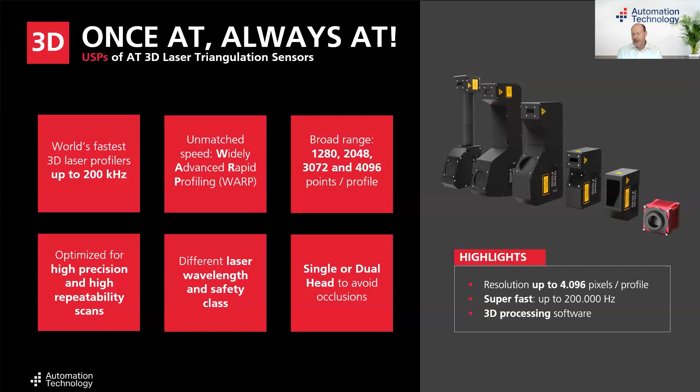Out of these sensors, we launched last week some special series. This is called ECS, standing for Efficient or Economic Compact Sensor. This means this is more or less the entry level, and we use the sensor with 2000 pixels - still not high speed, but fast enough for a lot of applications, and only with a red laser, 660 nanometers and 2M, meaning laser safety is not a big issue.

This is especially for markets like food and beverage, logistics, robot vision, where you need maybe more than one sensor - a multi-sensor application. So the costs are really important. Also, regarding the application, we talk about more or less millimeters, not micrometers. So this is the entry level.

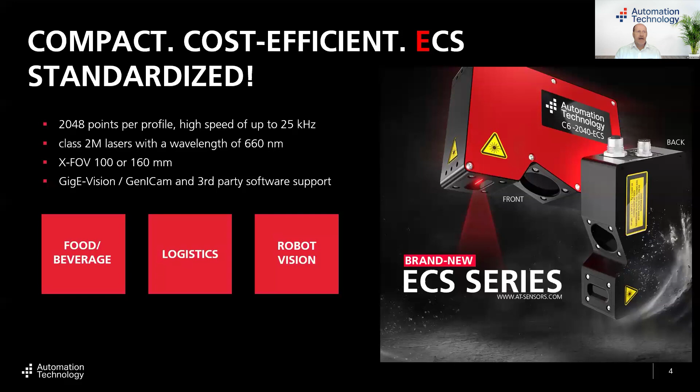And then I go directly to the high-end level. Last year we launched our new imager developed by AT - it's called the C6 3070, meaning 3070 pixels. If you look at the standard, normally a 3D sensor has an imager, and you transfer the complete image, meaning all pixels from the imager to the FPGA.

We go another way, and with our 3070 imager, there is a pre-processing. Means, you see it maybe in this graphic, we just detect the laser line directly on the imager. And then we transfer only a few pixels around this laser line from the imager to the FPGA. This means maybe 10, 20 times less information, and it's also 10, 20 times faster. And with this imager, we achieve up to 44 kilohertz.

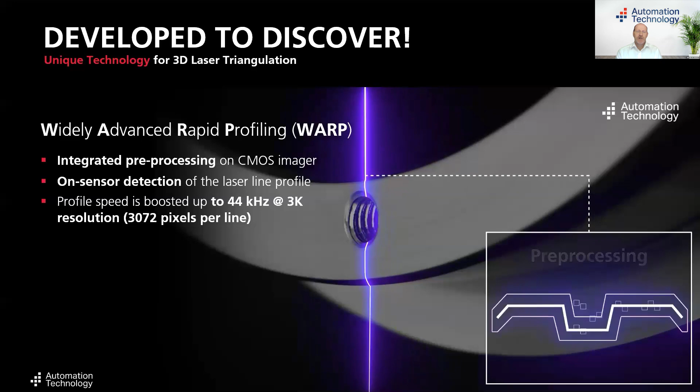And with this imager, in combination with the new 6 FPGA, which have double speed for the high resolution sensors, and in combination with the new I/O board, which has 2.5 and 5 gigabit per second to transfer this much information from the sensor to the PC, that's what we are calling warp speed. As I said, it's standing for widely advanced rapid profiling.

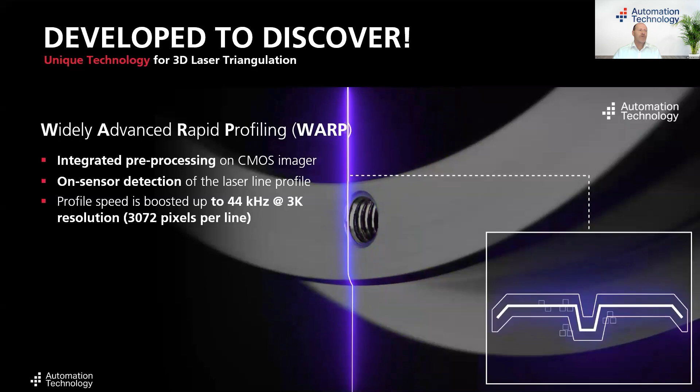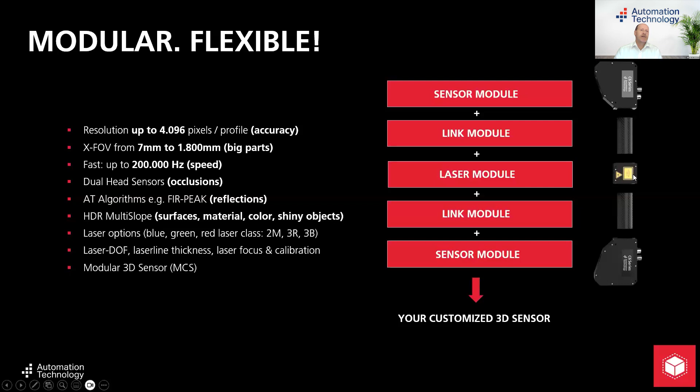But this was from low end to high end. And we also have some special series. We said yes, there are a lot of standard components and standard sensors. If this is not flexible enough, we have our modular 3D sensor, and then all of the imagers and lasers and so on, we can put these components together to have really a customized sensor, like you see on the right side. This is a dual head. There's a sensor module, a second sensor module, and in the middle, in between, there's a laser module.

As I said, this is a customized sensor. This sounds expensive, but it's not. We can have no minimum order quantity or additional engineering costs. And at the end, you have an MCS configurator. Then you insert all the data you need in terms of the laser, the working distance, the field of view you need, the triangulation angle, and then there's a sensor coming out.

It has at least two modules. One is the sensor module with the imager, the optics, Scheimpflug, and mirrors. And the second one is the laser module. And depending on the numbers which you insert, there could be maybe no link module in between, a small one out of metal, or a big one with a laser tube, carbon tube. So at the end, you get really an optimized sensor for your application, meaning the best solution you can get.

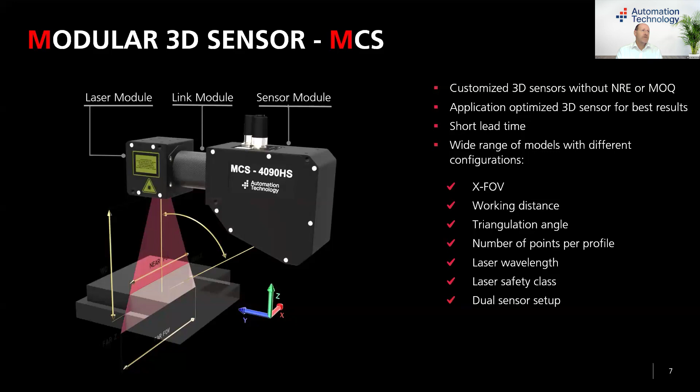And as we see it in a lot of customer applications, they have maybe a sensor where the field of view is not big enough, and they go maybe into the far field. Yes, okay, you can do that, but you can imagine you are out of focus, meaning the results are not really optimal. So this is the MCS, and out of the MCS, we made some special sensors called XCS.

It's really standing for maybe extreme, excellent, and this is really for performance. So we take an MCS with a high resolution, with 3000 or 4000 pixels, and bring that to a really small field of view, from 48 to 53 millimeters. And this is especially done for the electronic markets. For example, on the left side, it's for pin grid arrays or ball grid arrays, the BGA, or for pin inspection, where you need really high resolution and extreme speed.

In the past, maybe triangulation sensors were not fast enough for these applications. Now we can do that. And yes, for high speed you use the 3070 warp speed, and this is the imager. You also need really good laser line projection. Therefore, we need a special blue laser with clean beam technology. And at the end, you get a really thin laser line to get good results and a lot of information, for example, from these pins.

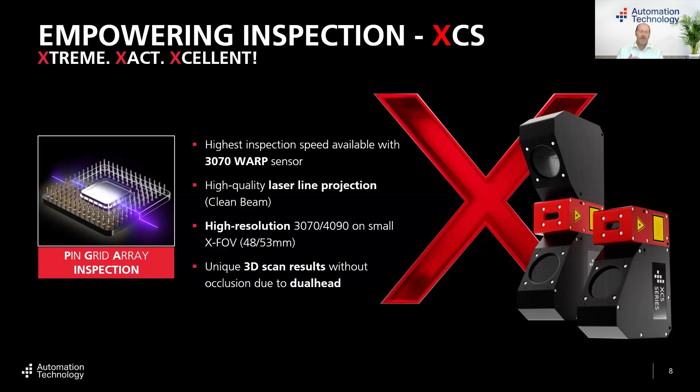So this should be a short impression to see what sensors we have. This is the first part of super fast, to get the images out of the sensors. In the past, yes, we just provided a sensor. And I always see a 3D turnkey solution like a puzzle, a complete puzzle, and we had one puzzle part. This is the image, the 3D image, yes, for sure it is the most important part.

It's because if you cannot see what you want to measure, if you cannot see in the image what you want to inspect, which defects, the best tools will not help. So in the past, you would send the images to your own software or third-party vision libraries, and then start to develop your application.

Since last year, we provide a solution package. So you not only get the image, you can also start with processing. You have the calibration in, you have vision tools in. You can do your own application with our software, with our hardware. You still need a PC, you still need experience in 3D vision, and yes, it's a PC-based solution, but it brings you much more benefits.

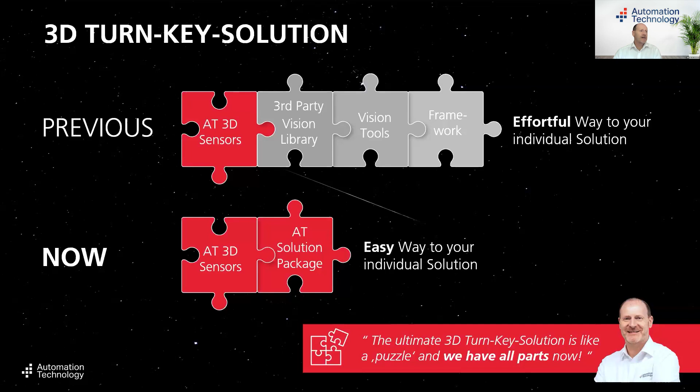To introduce the solution package, it has the software, the firmware for the sensors, and our SDK, which customers know as the CX-Explorer. There are a lot of features and parameters in it, and at the end you get a really robust image and a really robust application, but it seems a little bit complicated.

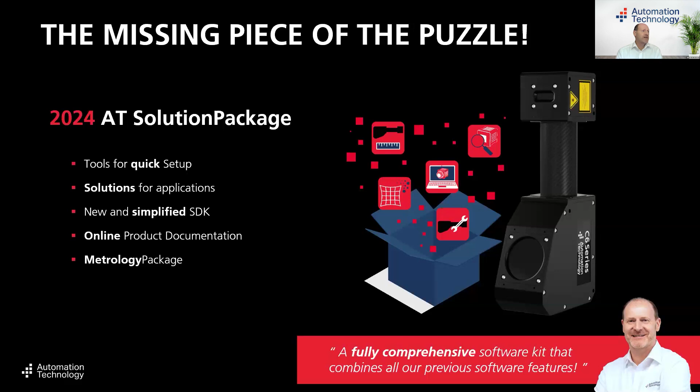So we announced the metrology package, and this metrology package is much easier. There's a much easier graphical user interface, as you see here. You see in this MetrologyExplorer all sensors in your network.

We directly connect a 3D sensor, and then you have all the parameters which you need to acquire an image, like exposure time, gain, triggering, you can see the encoder signal, how many profiles you want to acquire, and then it makes it much easier to get an image really fast from your part.

And as you said, we say within 10 minutes you get a first image. So this is the image, and then you start with development. We have a lot of samples, like here, for pin inspection. You can use this sample and then start to develop your application with your scripting. You see it in this example.

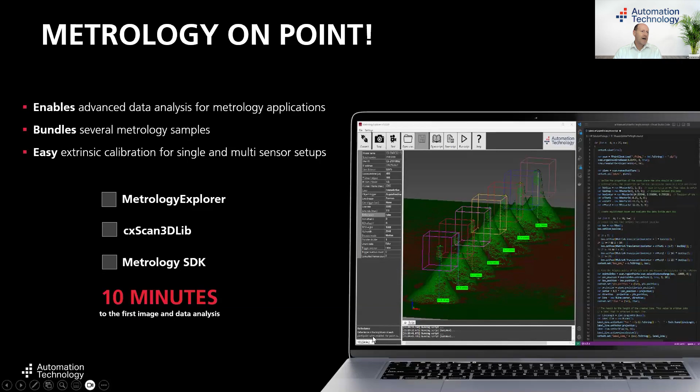But first of all, yes, you get the image, and this is one image with our XCS, this fast sensor, and with small scripting. And here you see the BGA, the ball grid arrays.

Another example is here with a part and the pin inspection, and here we still used one of the sample scripts. Then you see here exactly the measurement and the height of these pins.

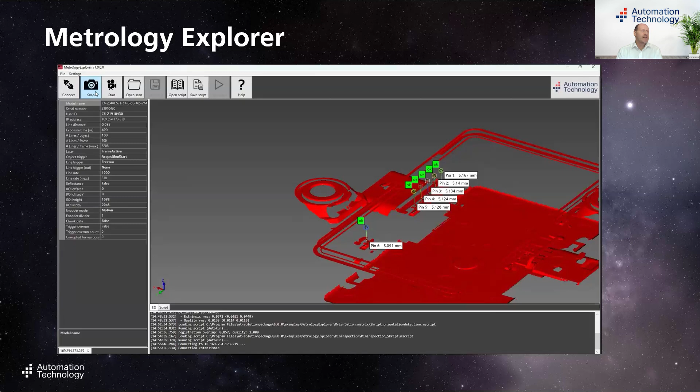So this is the next step: get a fast image, get an image in your PC, and then you start with the processing with this MetrologyExplorer. Super fast prototyping and development. We have a lot of 3D tools in it. Then you start the measurement and the metrology application.

If you want to do more scripting, if you need the source code of this complete application, for example you want to put this complete source code in another software in your machine, or you want to use it for deep learning or AI, then you can do that, and for that you need a development license.

But we also have things which are really important, like the calibration. We have a factory calibrated sensor, but this is along the laser line, meaning lateral. Also, to mount a sensor at 90 degrees in 3 dimensions is not easy, but you don't need to worry about it. We take a calibration target under the sensor, you do the calibration, and then it's fixed, and it doesn't matter if it's not exactly planar or not.

In this application, you see there are maybe 2 sensors. We have it as a dual head. You have two sensors, you have 2 images, and then you have to put these images together. Or in this case, you see 2 sensors mounted as a V with 2 different laser colors. The colors do not influence each other, so we get 2 images.

You see one mounted as a V, and with the calibration, the multi-sensor registration of our metrology package, you quite simply get one exact point cloud out of, in this case, 2 sensors. It could be 4 sensors or maybe more. But this is a really important point, and everybody doing software programming knows what I'm talking about: calibration, or getting the coordinate system of the vision sensor to the robot, can be really, really complicated.

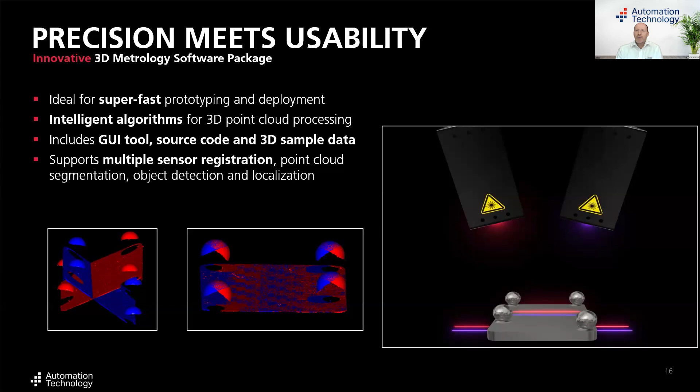We also have, since a few weeks, calibration targets in different sizes, so you can buy them from us. With this target, the software, the calibration, and the tools in the metrology package, it's really fast to get an application out of that. But as I said, you don't need experience in that. You can use this software to do the application really fast.

And you can believe it or not, but we make an offer to you. You can test it yourself. We can provide you a loan sensor. You can download the software and test it yourself to see if I'm right or not.

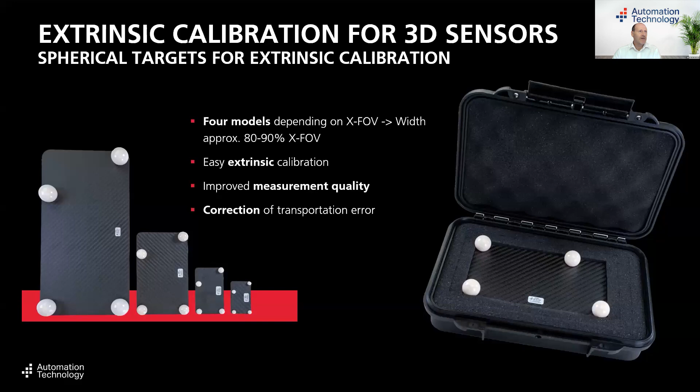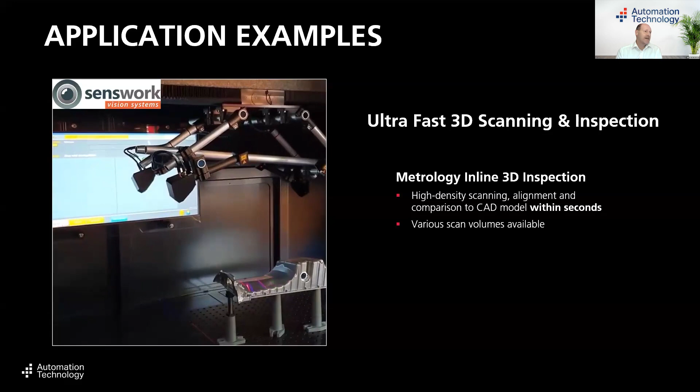We also have some nice application stories. Very often we're not allowed to show that, but here's one application from senswork. We talk about a SAT scan. It's a really big container with really accurate mechanics and laser linear axis. Here you can see there are 4 MCS, modular compact sensors, optimized in the field of view and laser distance triangulation angle. We chose 2 different laser colors with nearly the same laser line thickness, and the depth of field of the laser, to get really good results.

Out of these 4 sensors, with the metrology software, you get 1 point cloud out of 4 sensors. This point cloud is compared with the CAD data, and on special areas or points you can do the measurement and comparison—if it's all green, it's all fine. They also use this calibration plate, a bit bigger, with spheres, to do the multi-sensor calibration, and at the end you get a really good accurate result in the metrology application.

This inline metrology, today it's down to 8 seconds. In this case they're using the former sensors from C5. With the new C6 generation, it's more than double the speed, so you need only 4 seconds for that.

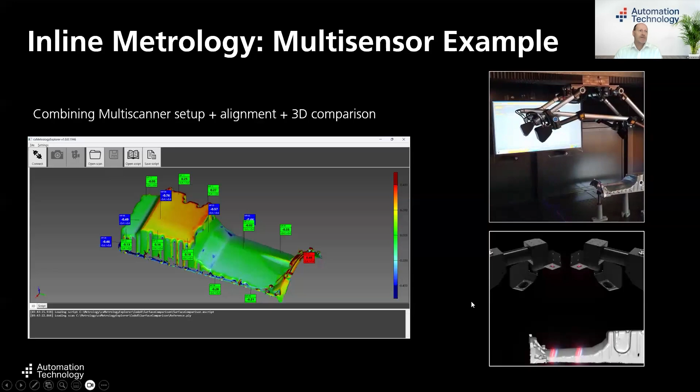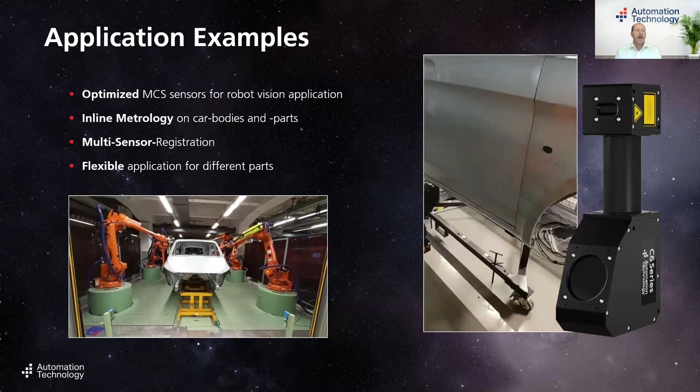Another application from automotive—you see here car bodies or car parts. Here one sensor is going up and down, inspecting a door, doing the measurement and also surface inspection, gap and flash. So the complete car door is inspected with an optimized modular compact sensor.

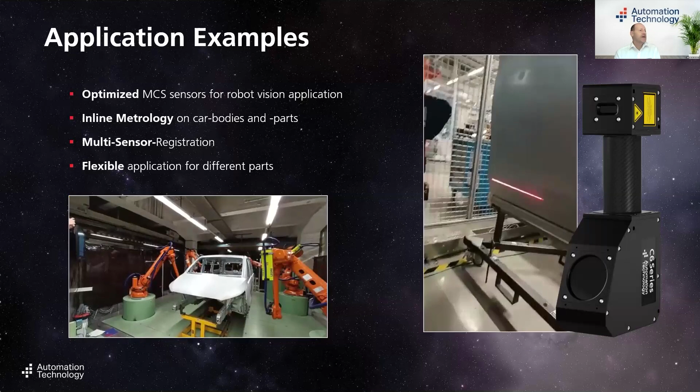And also for the complete car body, you see here five robots with MCS sensors doing the inline inspection of a complete car. This means 100% control—not putting this body offline in the lab to do the measurement. You can do it inline, and that's 100% of all cars and car bodies.

Another application from our partner in Germany, the company AKU. This was a 360 degree inspection of some gearbox parts and metal parts. In this image you see the calibration target they made for this. You need, without occlusion, the complete image around 360 degrees of this part.

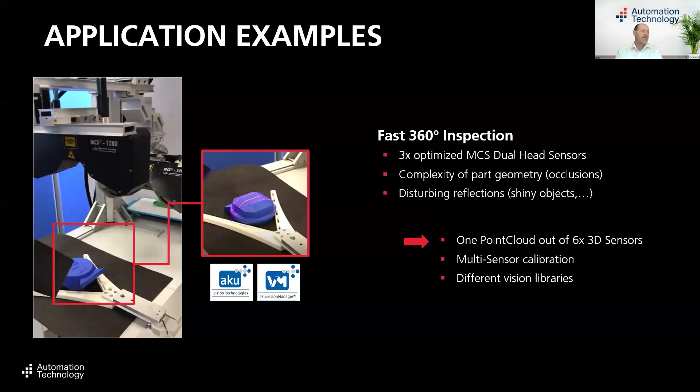Therefore they're using 3 modular compact sensors as dual head, meaning they have six images. Then with the software from AKU, the framework Vision Manager, they build the point cloud out of the 6 sensors to get one point cloud. This point cloud application can be done with different third-party libraries like VisionPro from Cognex or Halcon, and then you can do the complete application out of that.

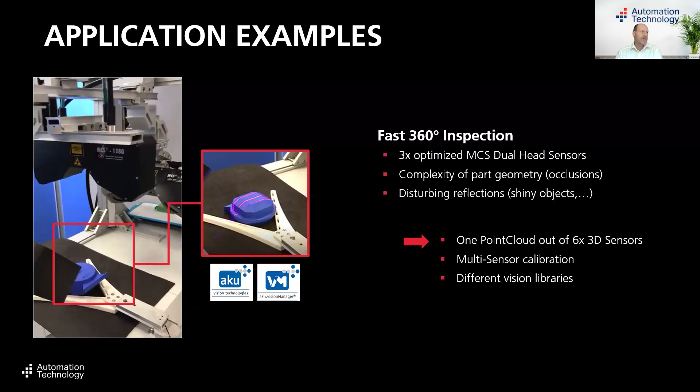So this is more or less the end. It was really fast to give you an impression that we have really fast sensors and really good tools. You can use it or not, but if you need it, it's really helpful to get an easy 3D metrology application in a short time.